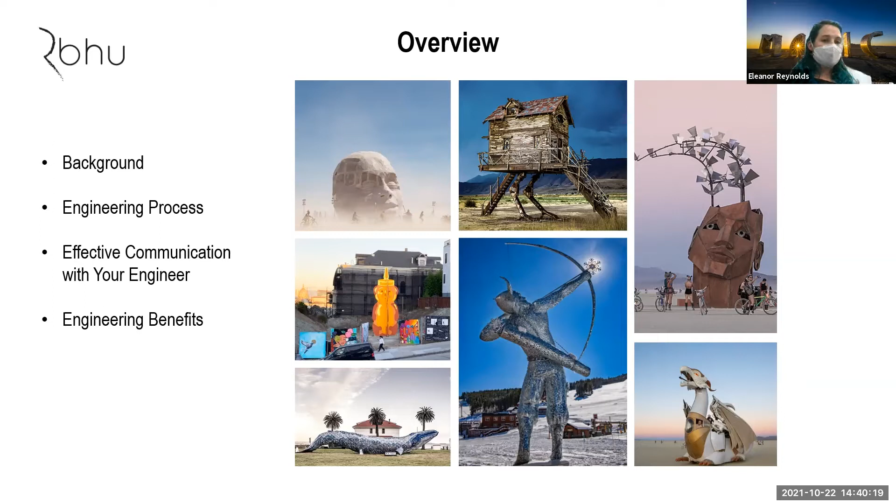So a little background about Rbhu. We are an engineering firm. That's how we identify. We're all engineers, but we have a lot of varied backgrounds. So there's mechanical engineers, civil engineers, architectural engineers, structural engineers. And so we have a lot of different experiences and backgrounds that have brought us together. There's usually about 6, but that can expand at certain times of year.

Any comments on sound? How is it on Zoom?

Great. So our first sculpture, which we're going to talk a little bit about in a minute, was done by Selinda in 2010. And then that sort of germinated. And then in 2014, Ali, who's my co-presenter, and Selinda formally created Rbhu. And since then, we've done about 150 different sculptures. There's a lot of variety in that and a lot of different kinds of materials that we'll work with, structural glass and concrete, steel, aluminum. So we're down to work in pretty much any material out there that we can get permitted.

And then also, big pieces, huge buildings and sculptures, down to smaller things that may just need some foundation consulting. We really want to make sure we're there to enable the artists to get their vision installed and out in the public space. We've been really honored to do some that have gotten a lot of press. We're sort of in the background on those, but it's been really an honor to be a part of some pieces that have gotten a lot of recognition. So that's been really wonderful.

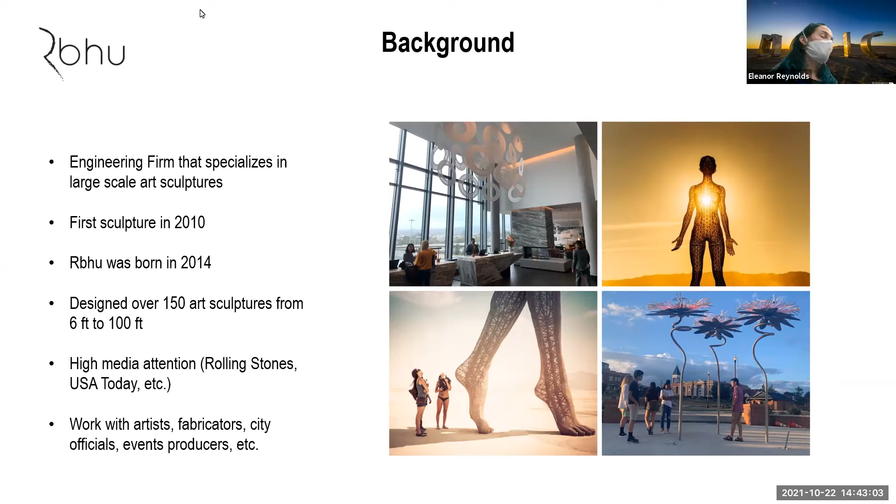And we work with the city officials a lot. If you've gone through the process of public art, you will know that that can be wonderful and it can be painful, but we are very familiar with the process. We work with cities all over the states. We're permitted in probably more than 20 states at this point, and we're always game to get new licenses. And then also, we do a lot of work with various event producers.

This is our origin story. This is Bliss Dance. She is a sculpture that was done by Selinda. She was that seed, and I'm going to get her to talk about it actually.

Hello, MSAers. I'm Selinda Martinez. I'm one of the co-founders of Rbhu Engineering. Wishing you a very warm welcome from Portugal, and also here to tell you a little bit about Bliss Dance, the very first sculpture we engineered in 2010. I was a senior at Cal Poly in San Luis Obispo, California, and this was my senior project. So it was the very first thing I ever engineered. And she is a 40-foot tall sculpture of a woman dancing on one foot.

So, no small engineering feat for a new engineer, but she's the catalyst for the birth of our company and why we're all here today. So, very thankful for that.

Structurally, she is a steel space frame within, and then she has a secondary space frame that makes the contours of her body, and then is sheathed with a metal mesh. You can imagine that at the base of her foot there's a lot of forces going through that. So believe it or not, in that small footprint, we have six 2.5-inch diameter solid steel bars supporting all the loads.

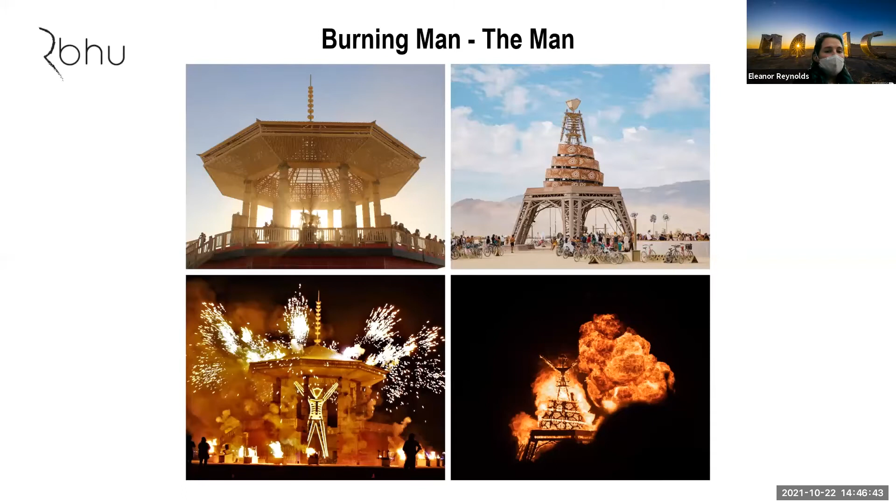We have pretty intense windstorms out there, they can kick up a lot of dust. And then we also have a very unpredictable level of human interaction with these sculptures. We really aren't totally sure how the community is going to want to interact, and there's not a lot of rules. So we are very thoughtful about the way these pieces come together and the way people might want to explore these sculptures, which is incredible, but we want to make sure they're safe.

So they're these very sturdy sculptures that can take a lot of beating, but also they need to collapse and burn quite quickly. They need to collapse inwards on themselves so they come down safely and burn uniformly. We're working with the artists and the designers to make sure that as we think about how we're going to put it together, we can build it in a couple of weeks, and that it will collapse down on itself in a very safe, quick, and beautiful way, because that's a big part of the experience of the temples and the man.

The other realm we work in a lot is the public art sector. That has a lot to do with the fact that jurisdictions will often require, if not always require, their artists to engage with a licensed local engineer. This has to do with public safety and bureaucracy and all that sort of thing.

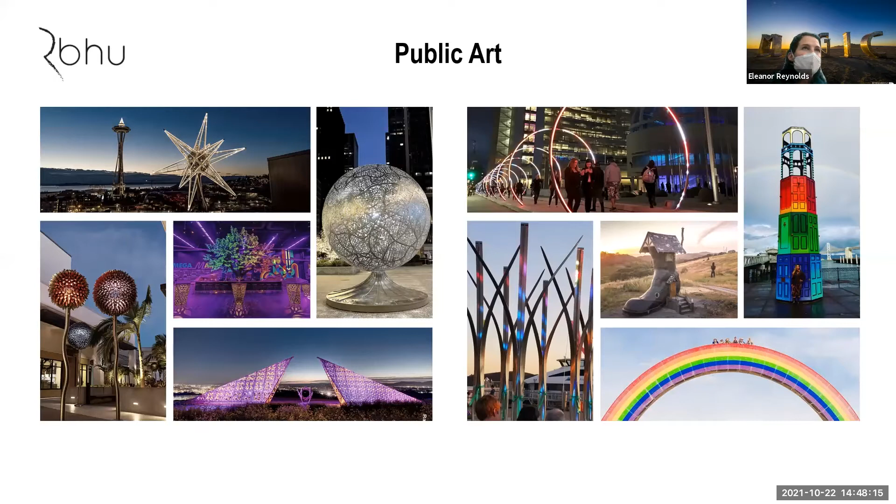But we really see ourselves as a way to enable artists and come alongside artists to help them get through the process and achieve their vision, and help them connect with fabricators. Because sometimes we're working with artists who don't really know—they have this great vision and they've been selected by a jurisdiction or a committee like GSA—but we want to help make sure they get the right team involved to get their installation done.

These are a couple of projects that just show a wide range of sizes and scales. They're all over the states. I don't know that we have time to talk about each and every one, but I'd be happy to, or Ali, you can ping us, email us, whatever. You can check out our website, we have a lot of examples of our work up there as well. And by our work, I mean our collaborations—we are always working with an artist.

The last thing I want to talk about before we get into the engineering process is something we touched on a little bit: the giving campaign we do annually now. The idea for Rbhu Gives Back started in 2019.

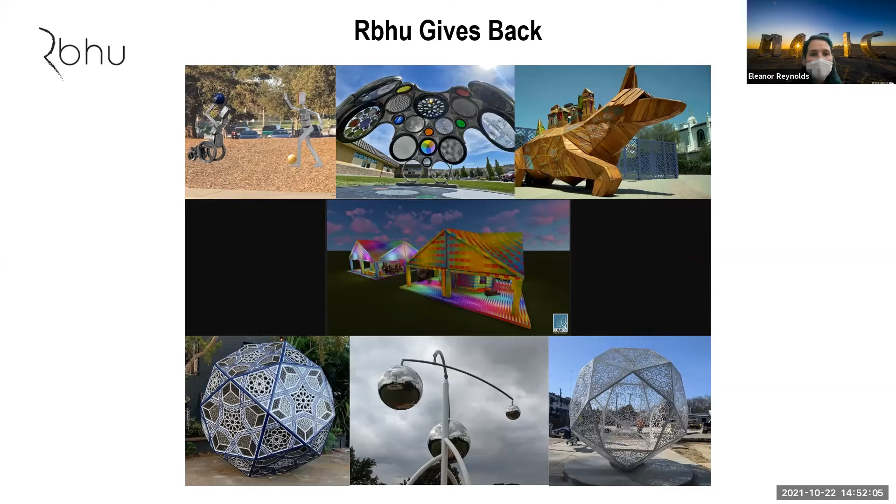All right, well, I'm going to talk about the engineering process, the most interesting part of this. I'll try to make it as fun as possible. There are 6 steps I'm going to go through from the beginning to the end, what the beginning looks like, towards what the end product looks like from the engineering perspective.

First, what we need is an idea. We need your idea to understand the sizes, the height, the width, and all the parameters needed for the engineering. The best way to do that is, first of all, we want your idea to be dialed in perfectly before you hand it to us as engineers, because when we start the work, we are pretty much assuming the vision is dialed in and the aesthetic is how you want it.

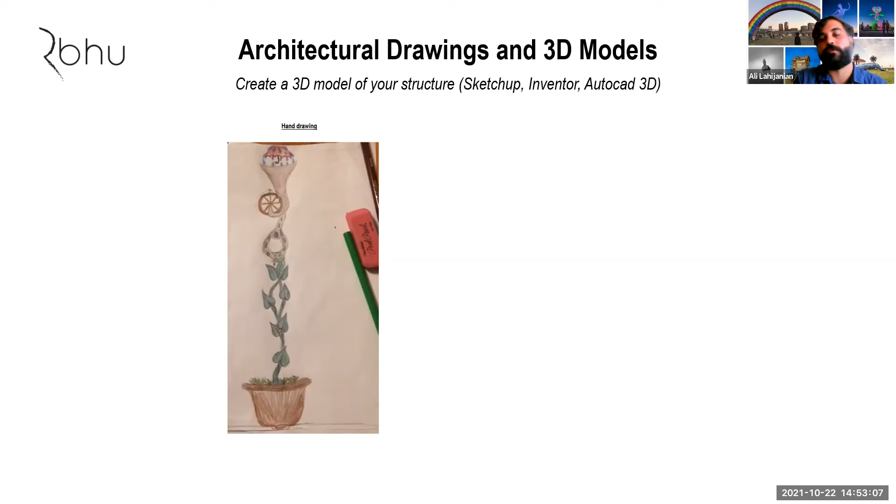So for you to be able to do that, this is a suggestion: bring your vision into a virtual world, a 3D model, to be able to understand the ratios and the aesthetics. In the virtual world, it's obviously a lot cheaper to change things, update, and make any aesthetic changes you need.

There are a lot of programs out there like SketchUp, Inventor - I think it's free for students - and AutoCAD, but there are also a lot of free 3D modeling programs you could find if you search online. We highly recommend doing that because, as I said, it's a lot more economical to change things in the virtual world.

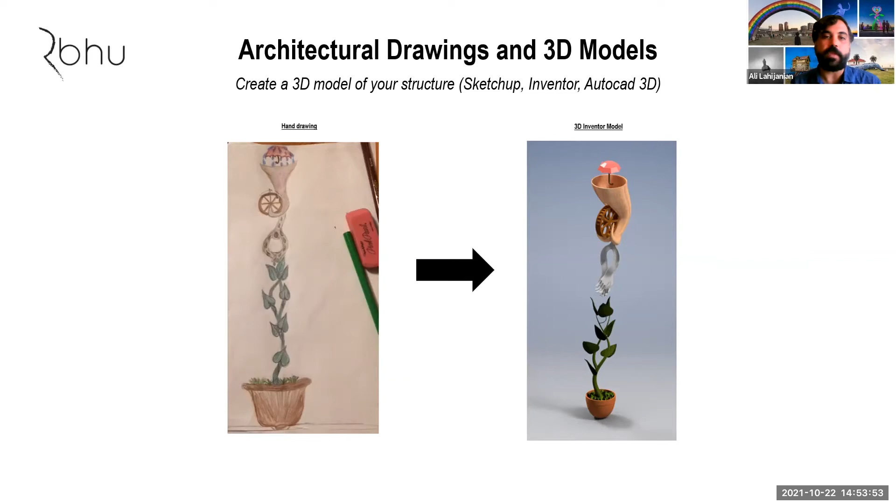After making a 3D model, going to the 3D model aspect also really helps with the mechanical systems, to be able to dial in your mechanical component. For example, this is Noetica, which debuted in 2017. We came up with this very complex bearing system that had 6 degrees, 3 degrees of freedom, with cubes moving in space.

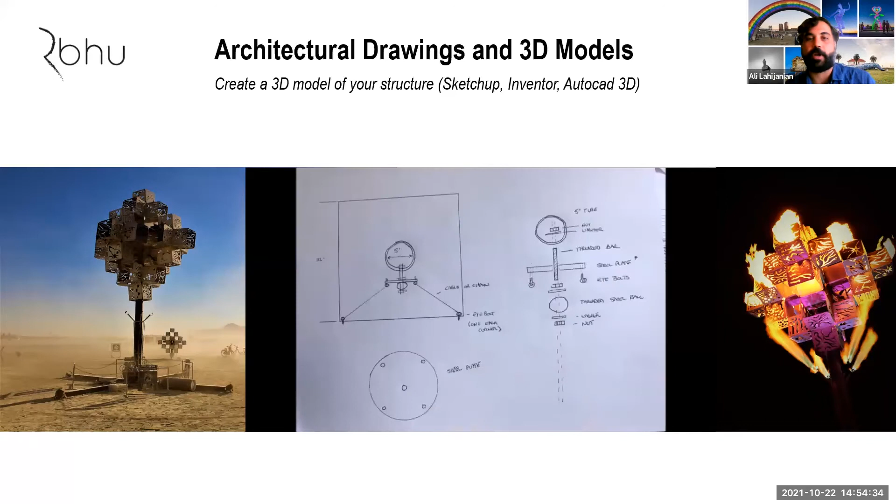When we 3D modeled it, we realized there are clashes within the cubes, and this system is not working as well as we thought it would. So we went back to the drawing board and came up with this really simple system: just a ball joint with wires coming up. We modeled it and it worked perfectly, so we were really happy.

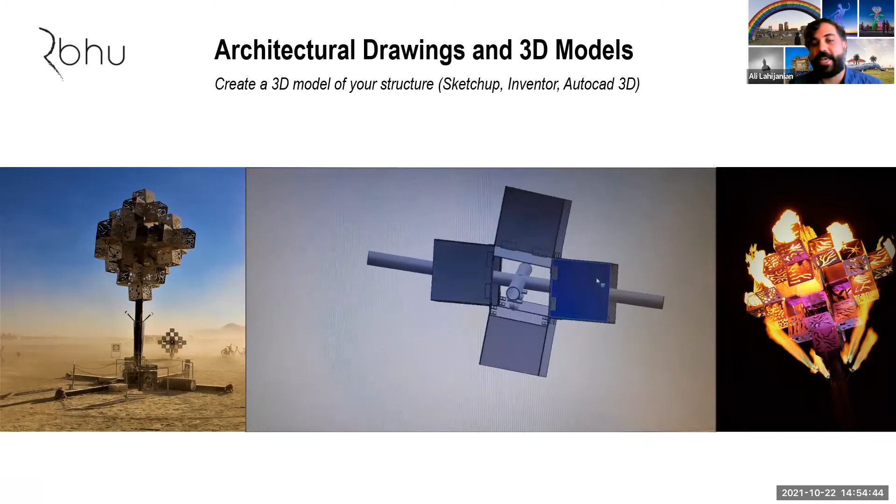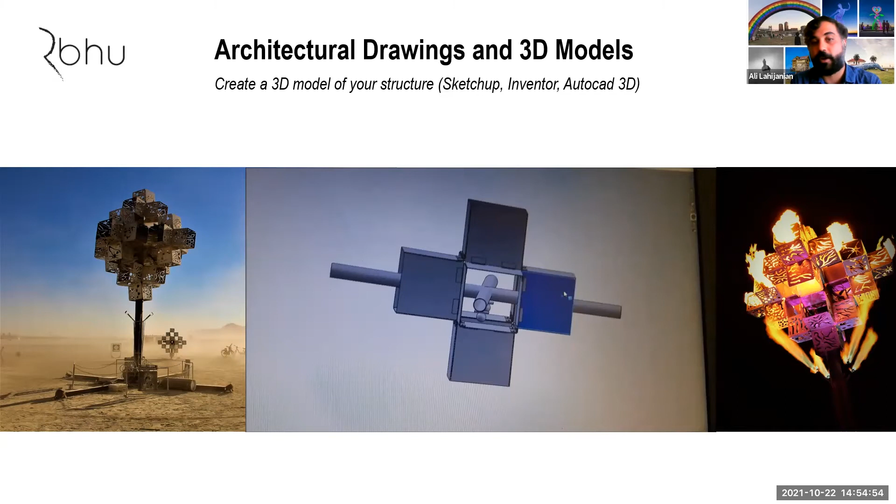We proved the concept through a 3D virtual world, and that was a lot more economical than actually prototyping. So after you bring your vision to the 3D world and figure out your aesthetics and iron out all the kinks, we recommend doing a scale model.

It's very important for you to hand in a product that you're happy with visually to an engineer. There are other ways to make a scale model—you could 3D print it, since with today's technology everything's easier than before. You could take your 3D model and just print it, and in the physical world you can see the ratios and make aesthetic changes that you need.

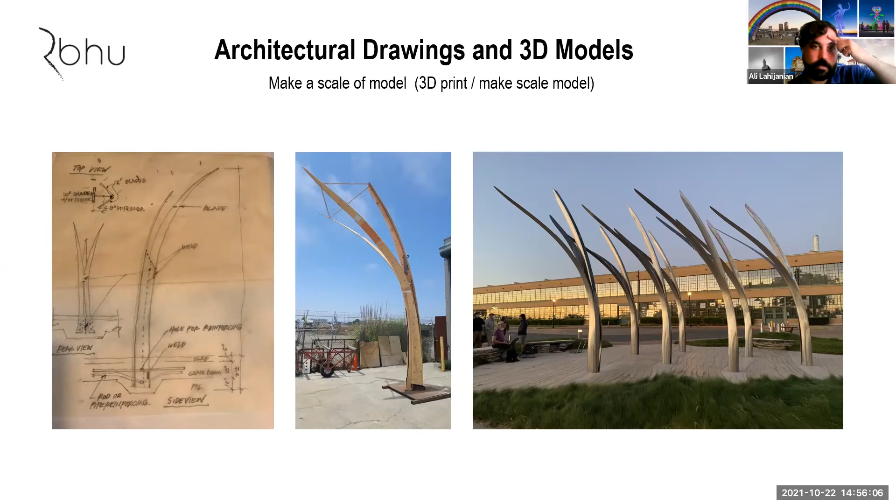So after you dial in your aesthetic vision and know this is what I like, this is what I want, you want to hand it to us. The reason we say that is, for example, in the middle of engineering if you say 'I don't know if I like this ratio, I want to make it smaller or bigger'—those changes have huge impact. Maybe some won't, but there's a potential for some changes to have a huge impact on the engineering, and we might have to start from scratch.

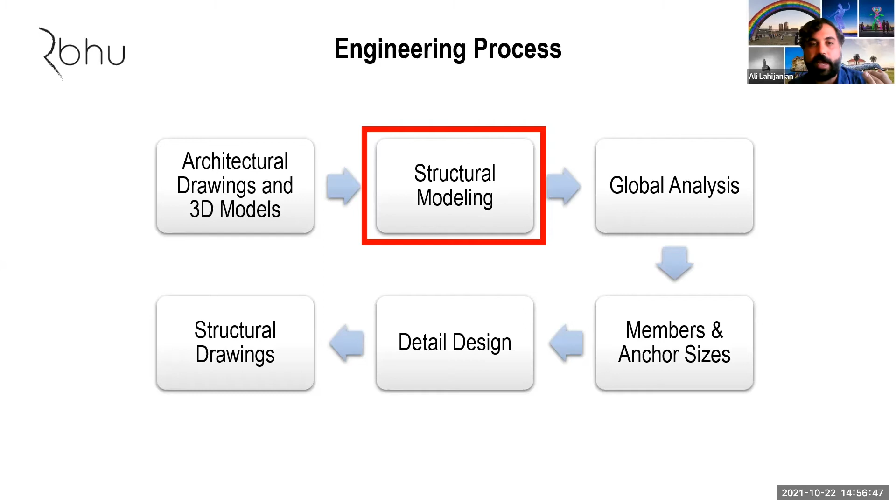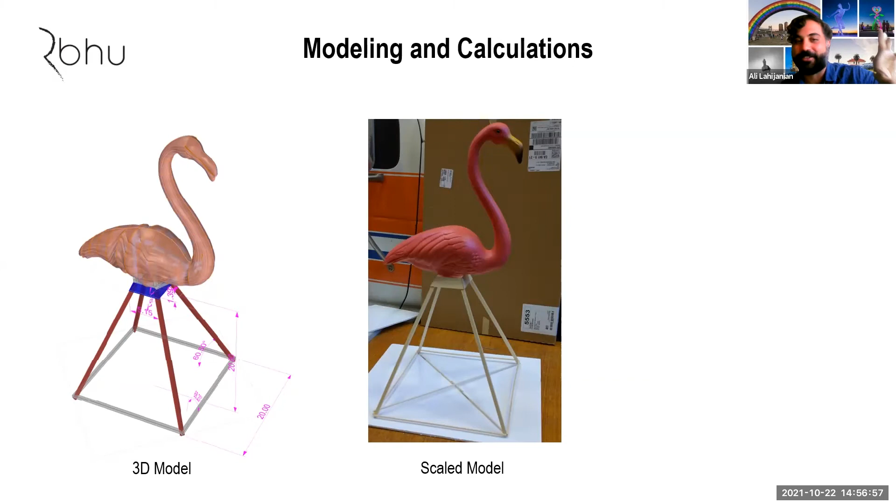So after you do the 3D model, I'm going to show you this example of the flamingo. This is also a very controversial piece—people think we made the piece have 4 legs. No, the artist wanted the piece to have 4 legs. I just wanted to put that out there before I talk about it.

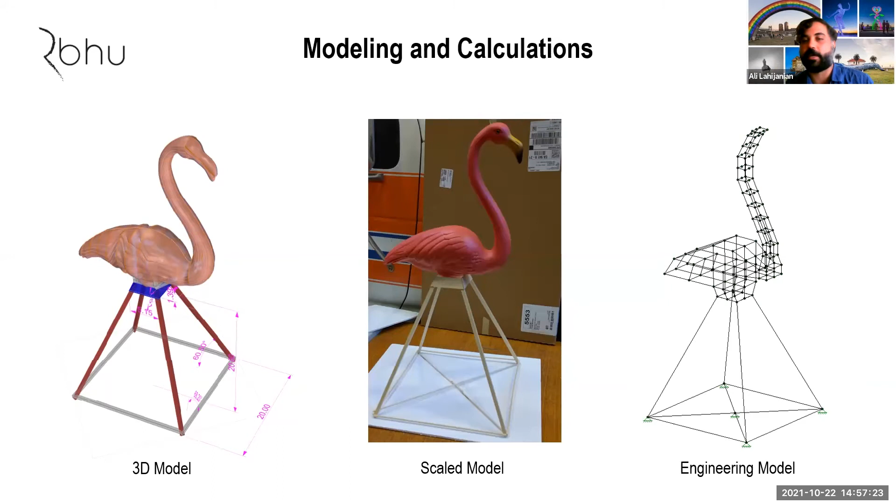So we start with the global analysis—meaning we size the tubes, the pipes, the plates, and the I-beams. All that is the global analysis. So we take the model and put the wind load on it. In this case, there were also humans going up the ladder and to the top, so we put the live load. These are all the loads that the structure will experience.

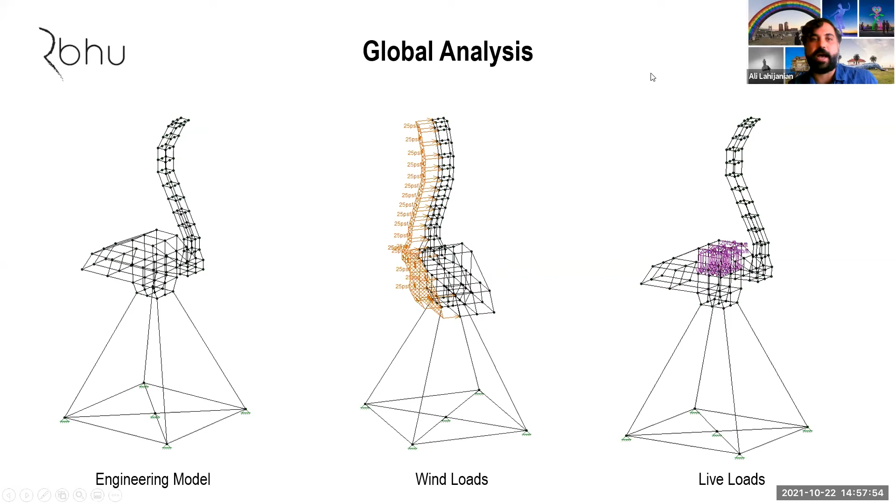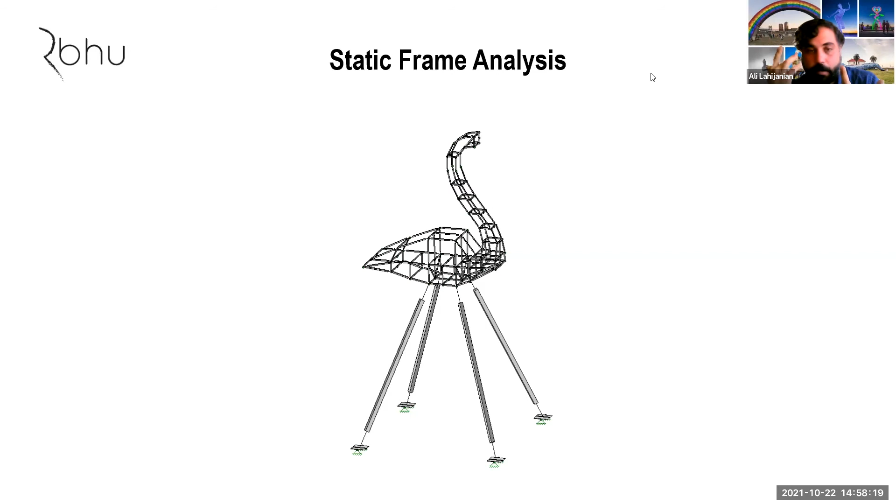Then we do the analysis. There are 2 types: one is static, meaning it doesn't move; the other is dynamic. Within static or dynamic, there are 2 types: one is frame, the other is shell. Shell means it's made out of plates. Frames are like square tubes, pipes, I-beams—well-defined components or members. Shell analysis is made out of plates.

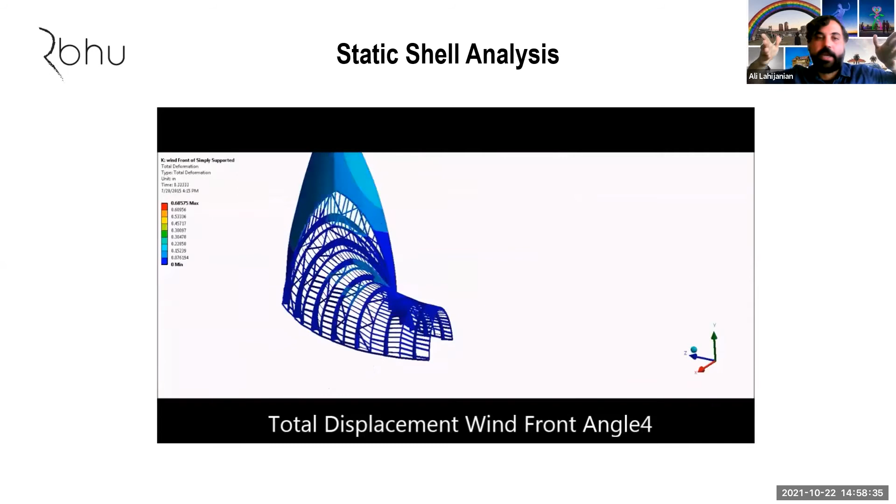For example, in the temple that Eleanor showed earlier, the crown at the top is made out of plywood, so it's a bit more complex engineering—a different analysis, but very well possible.

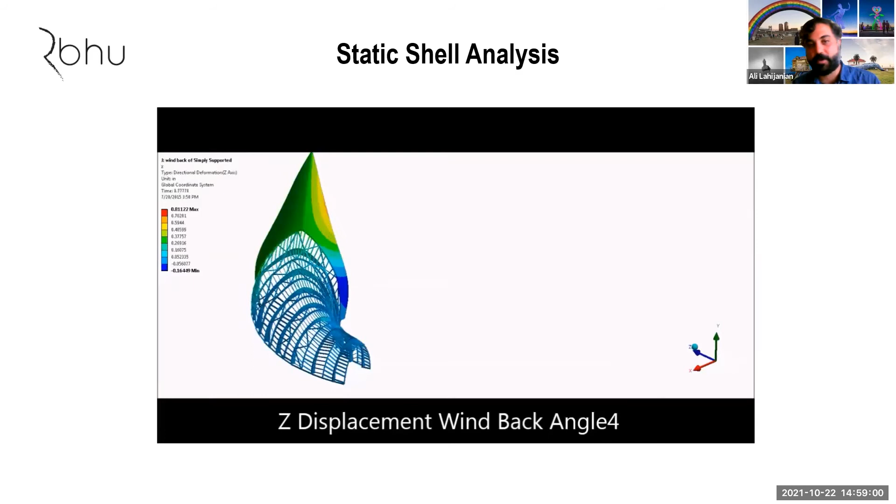So in this video, the wind is hitting it in different directions and you can see the movement. This is exaggerated by like 40 times, so with the naked eye you won't see that much displacement—it's not that scary, but we do our analysis so we understand the movement, the motion, the load path, and all that, and then the stress.

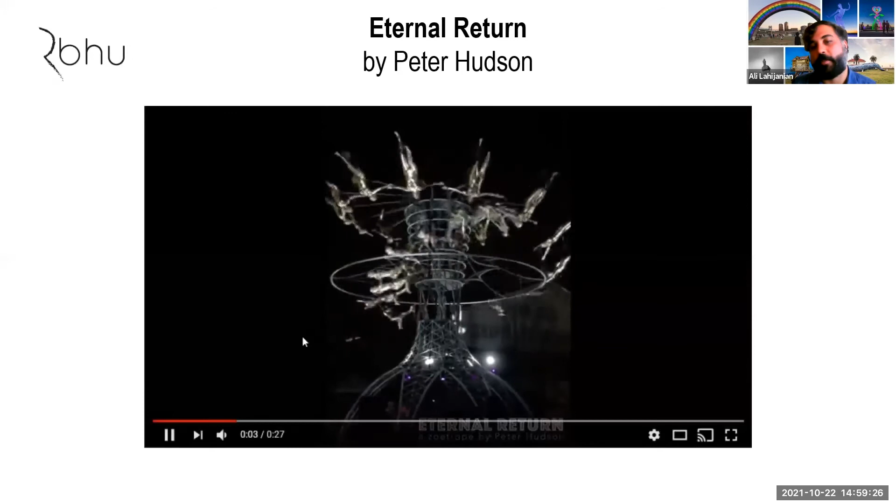So the next slide, this is actually the first sculpture that I engineered, for Peter Hudson. He was in Marco Cochrane's shop, so he needed a mechanical engineer, and I joined his team. This is a stroboscopic zoetrope. It's 24 feet tall. They're cast humans going up the ladder and doing a backflip.

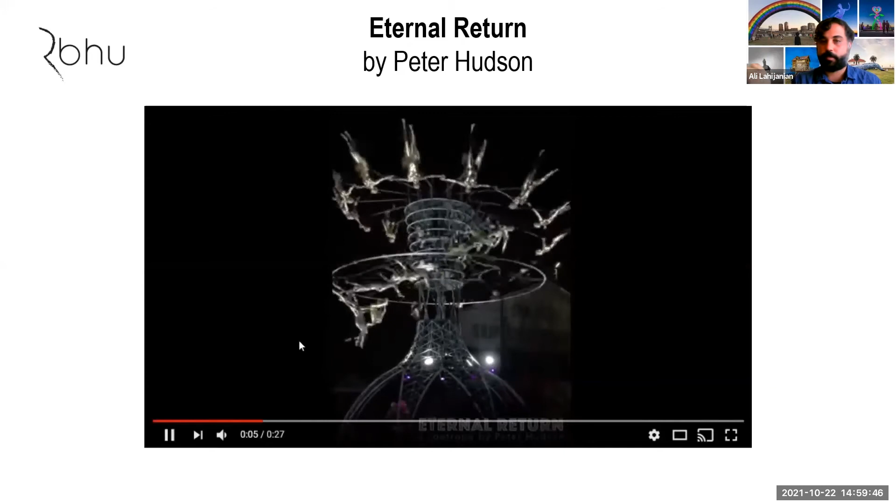The frames per second of the video don't match the strobes, so you can't really get the full effect, but you kind of get the idea. So this is dynamic, the top portion moves, and these figures look like they're going up the ladder and doing a backflip. For this one, this is a dynamic analysis.

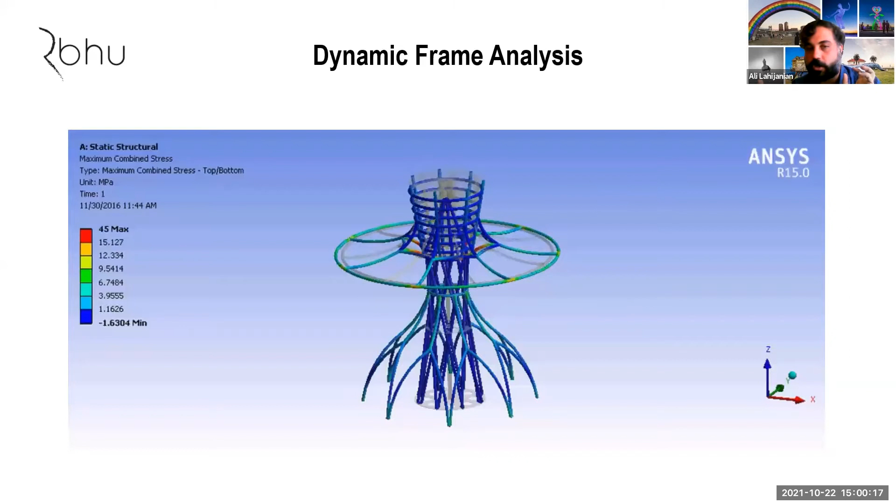And the dynamic analysis, as I mentioned, are frames. So you can see these are the Schedule 40 4-inch tubes. And the red parts that you see are hotspots, meaning that they're seeing the most amount of stress. In this case, they're not failing. They're still way below the allowable, but you can see where the critical parts of the structure are that we need to pay more attention to.

On the next slide, you can see the plate analysis. So this is the shell analysis. As I mentioned, it's a little bit more complicated because you have to discretize it, but that's the type of analysis we have to do. And then you can see everything is blue except that top part that is turning. The stresses are mainly over there, but again, they're below the allowable. So that all worked out.

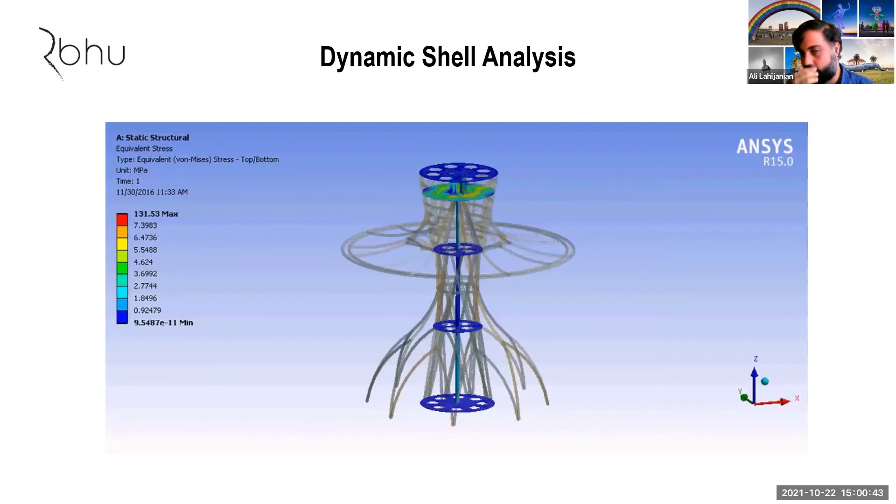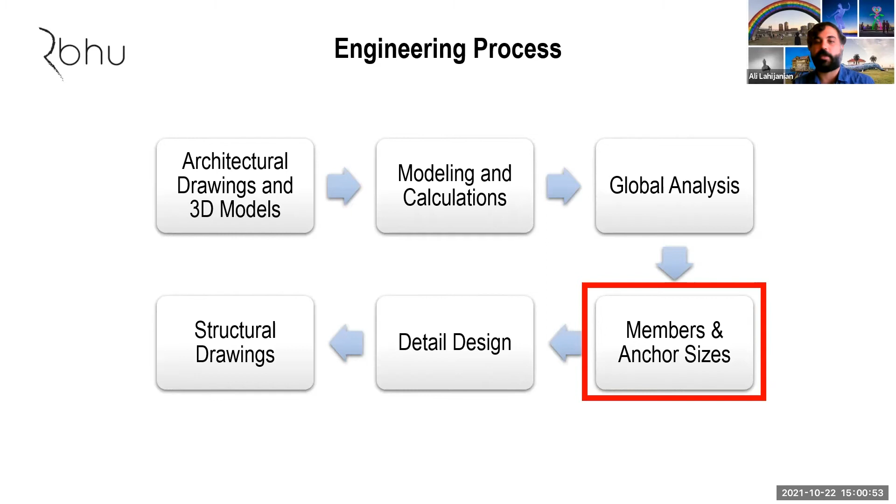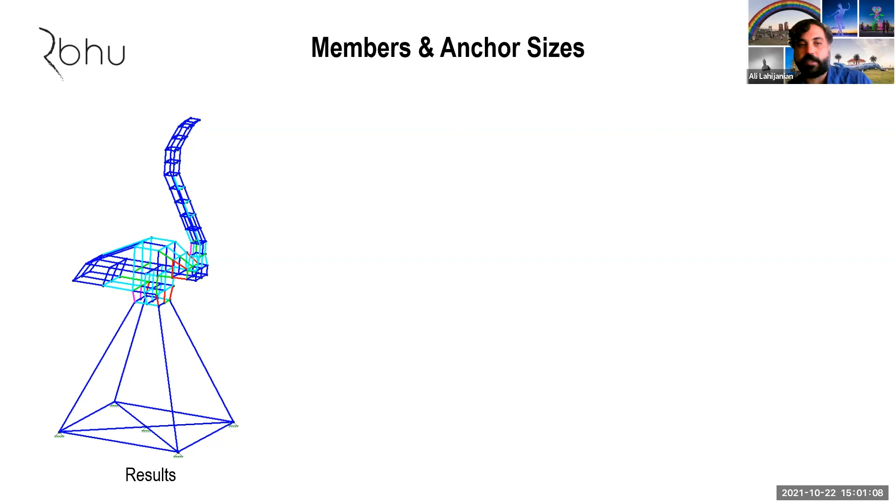So after we finish our analysis, we come up with the member sizes, and we provide the global member sizes, meaning the sizes of your tubes, the plate thicknesses and such. So this is on the left, the frame analysis, the static, and you can see the red parts in this case are failures. So we went back to the artist and told them, okay, here are the parts that are failing. And what you can see, we modified it and we optimized it.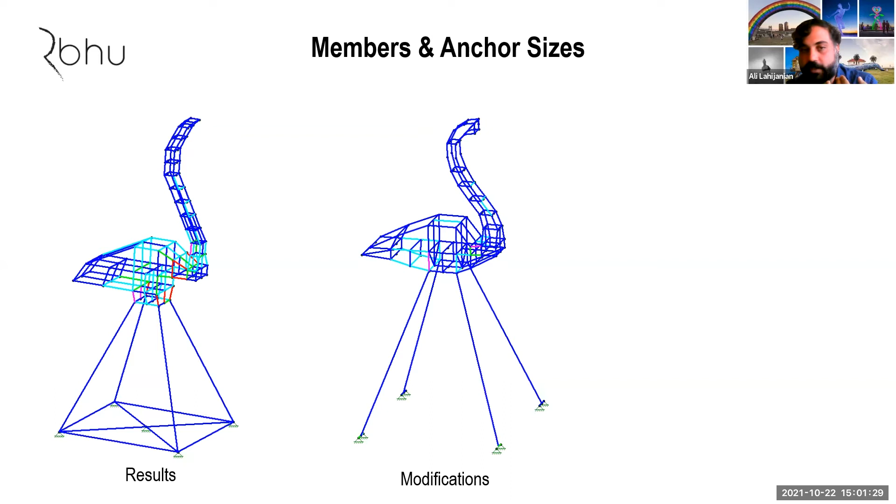There are a lot fewer frames actually in the middle one than the left one, because we understood the load path, we understood where the critical parts are, how we should go about this such that it's structurally sound. So we achieved that. And at the end, we came up with the sizes. The legs were 6-inch square tubes, 1/4 inch thick, and the body was 2-inch square tube, 1/8 of an inch thick. After we come up with that, that's also where we know the loads for the anchors.

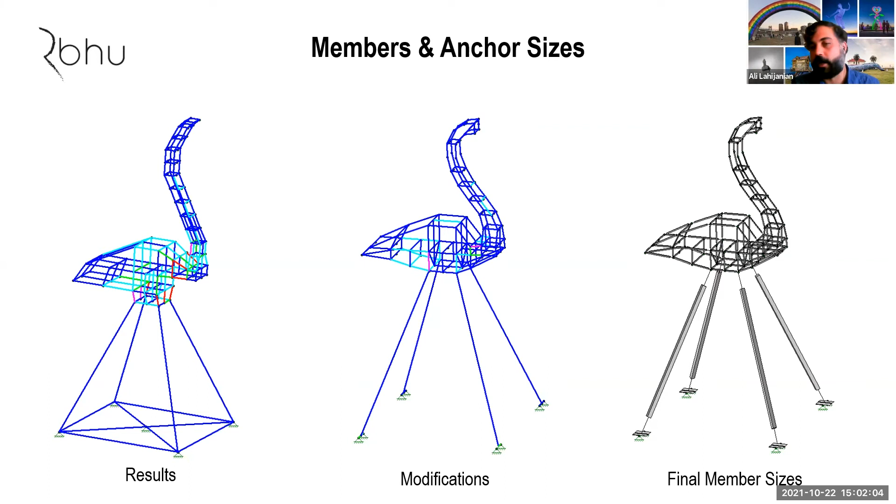And sometimes for city projects, for example, they want to put a foundation in yesterday. So this is the point where we're like, okay, now we can design the foundation. Now we can design the anchorage and base plates. So they can do their thing while we finalize all the little details and nuts and bolts, which I'm going to show you on the next slide.

We do the detail analysis. Detail analysis meaning all the connections that are happening, nuts and bolts. So in this case, there were 2 attachments. The neck was separated from the body, so we needed to design a bolted connection there, and also the legs were all coming off and needed to be attached.

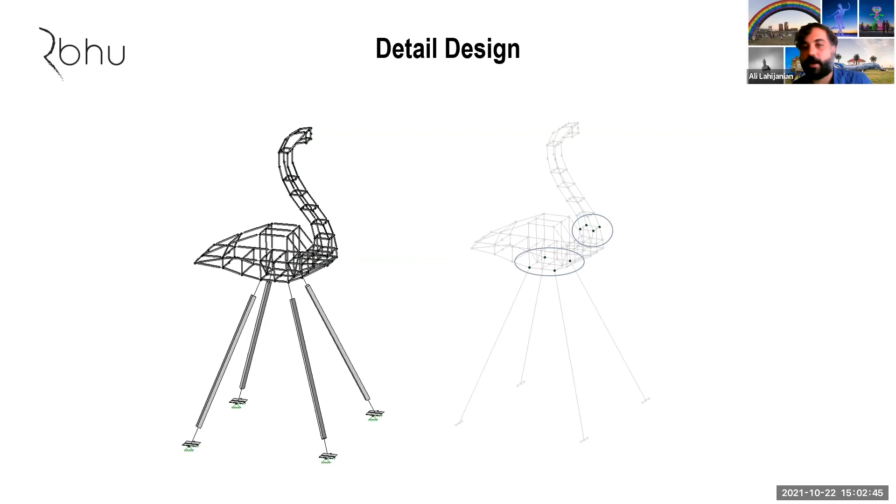And so after the global analysis, we know what forces are going to each of those nodes, those points that you're seeing. And then we take that and we do the analysis. From that on, we should have all the sizes of the plates, nuts and bolts, all the global analysis. And now it's time for us to communicate to you what these are. So we do structural drawings.

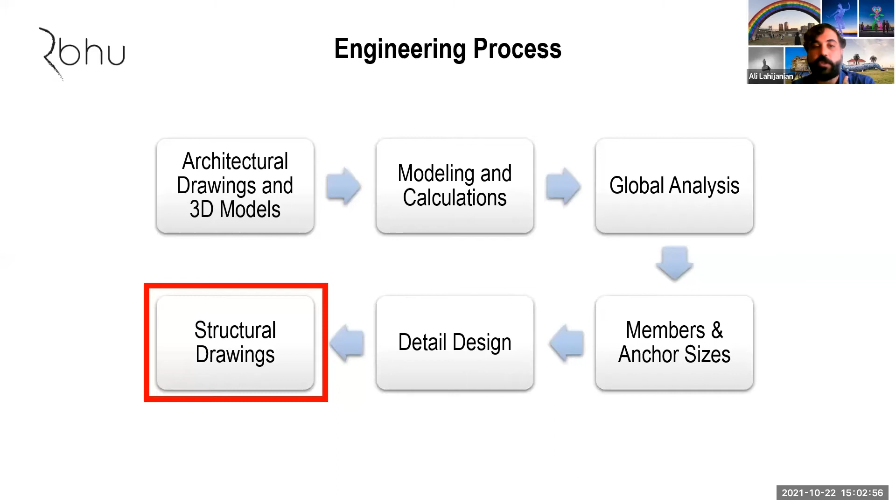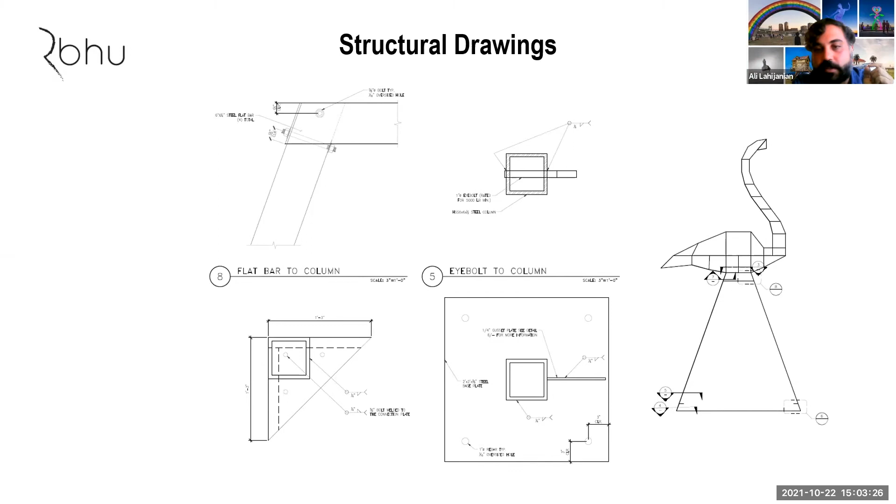The structural drawing is pretty much the blueprints of your piece. You know everything that you need to know about the sizes. I want to mention that structural drawings are different than shop drawings because they're not dimensioned for you to cut and build, but they have all the sizes and global dimensions that are needed. And in the next slide, you can see the plate, the bolt distances, exactly what welds you need to use, and the details of, for example, the anchors.

This was a Burning Man project, and we used ground screws with guy wires. So you can see that on the left, and on the right, you can see the body attachment, how we went about it with 3 bolts. I think they were 5/8 bolts, and you can see edge distances are really important, so there's no tear out and we don't face issues.

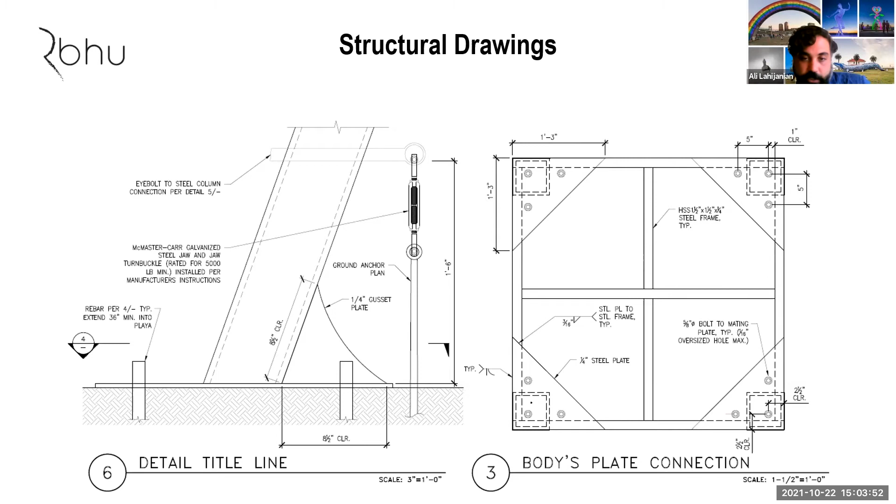So that's pretty much what comes out of it. And for permit, I must also mention that the cities require structural drawings that are stamped. We have done projects all over the US, and we're looking forward to doing more around the world as well.

So in addition to the structural drawings, we need a calculation package. For all our analysis, we make a report, we showcase the loads and all the forces, and then it goes along with these drawings that are all stamped, and the city reviews it and issues the permit.

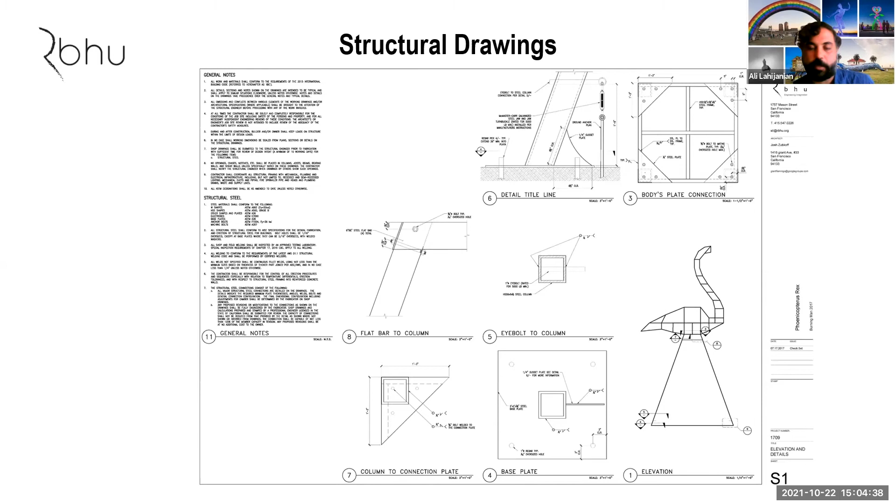And so this project, he did all the steps as we talked about, and at the end it was a very successful project. He got a lot of media attention, even though it was controversial because he was 4-legged, but a lot of people loved it. Rolling Stone wrote about it, ArtNet, USA Today, and we were honored to be a part of this.

The artist's name is Josh Zubkoff, and he's an amazing artist, and we have done multiple projects. This was actually his first large-scale art project, and so we collaborated really closely. From then on, he made multiple other sculptures that you may see. This one behind me, Rainbow Bridge, is also Josh Zubkoff. So he's a very successful artist now.

So let's talk a little bit about communication with your engineers and your engineering friends, and some strategies. One of the things about being an engineer is we're working with the laws of physics, right? There are some things we can play with, but ultimately we can't control gravity, and we have building codes that require us to design to certain standards.

And so it's really helpful when we are working with artists to understand what's really important to you. Understanding your priorities and what your goals are, so that we can make sure we steer you in the path that will get you as close to those goals as we possibly can.

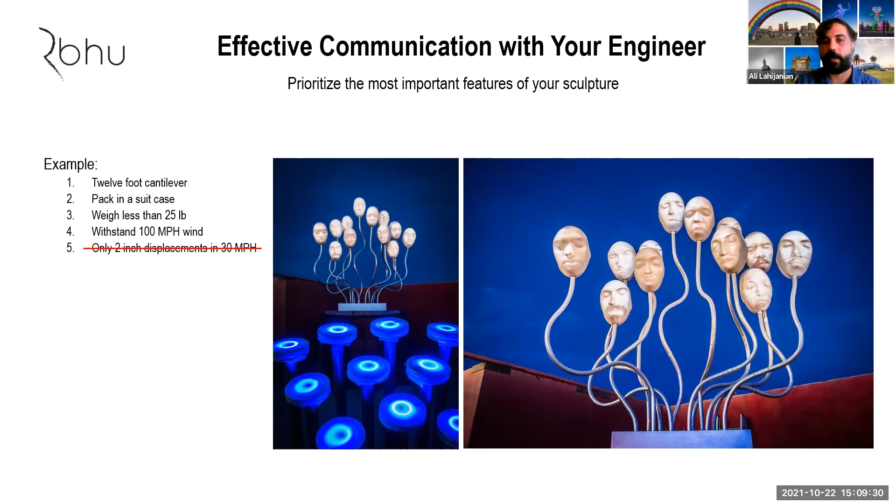And then a couple other things to touch on when you're thinking about working with your engineer, whoever that may be. One of the things that's going to be really important to your engineer is where you envision this to be located. Do you want this to travel? Do you want this to be a permanent installation? Where is it going to be? Because the hazards, what we call loads, basically like wind force or an earthquake that comes along and shakes your sculpture, that's all very site specific.

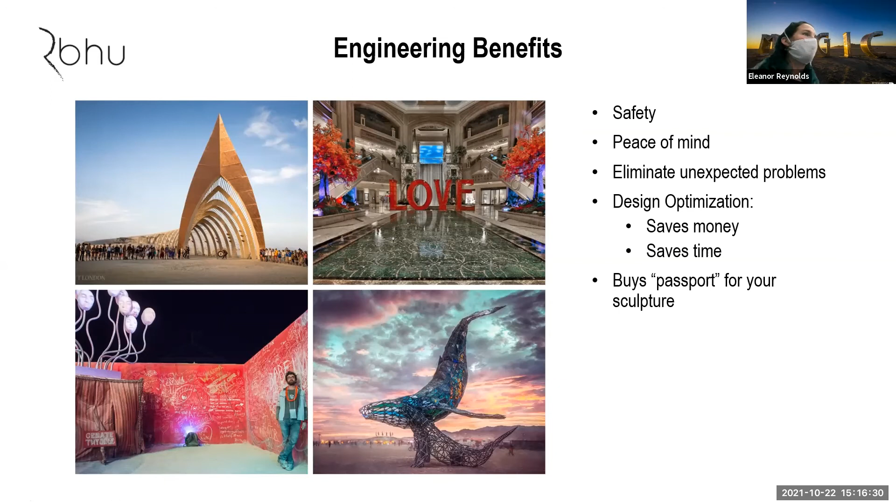So I'm going to open it up for some questions. Hopefully we knew we shouldn't provide any math equations or math tests and things like that. But if you have questions for us, it's time to wake back up.